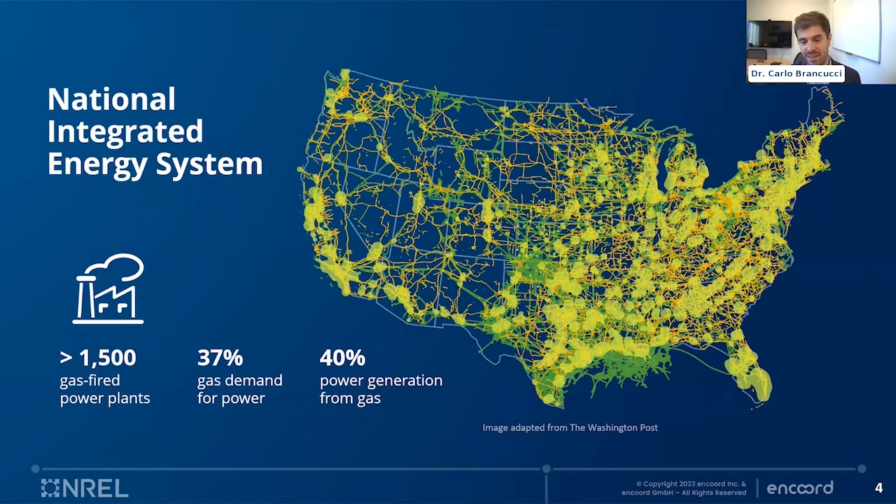This interdependency and this critical infrastructure challenge that can significantly affect national security is exacerbated during extreme weather events. And I'm going to show you an example of a balancing area of the US power system from February of last year. This is real data taken from EIA, the Energy Information Administration, that shows how in this balancing area in the United States, during this 5-day period, there was a significant electric demand day-ahead under forecast. So the power system operator under forecasted the demand that it expected the following day for some reason.

That following day, what happened is that wind power dropped from generating over 3,000 megawatts to just over 300 megawatts. So over an 80% decline in a 20-hour period, while demand was increasing during that period. The system was able to meet demand and keep the lights on.

And this was possible thanks to the response of very fast responsive gas-fired power plants that were able to increase their generation from 1,400 megawatts to 3,800 megawatts in 18 hours. That means the gas pipeline network was able to significantly increase the gas delivery at those gas-fired power plants, so they could ramp up from 1,400 to 3,800 megawatts in just 18 hours.

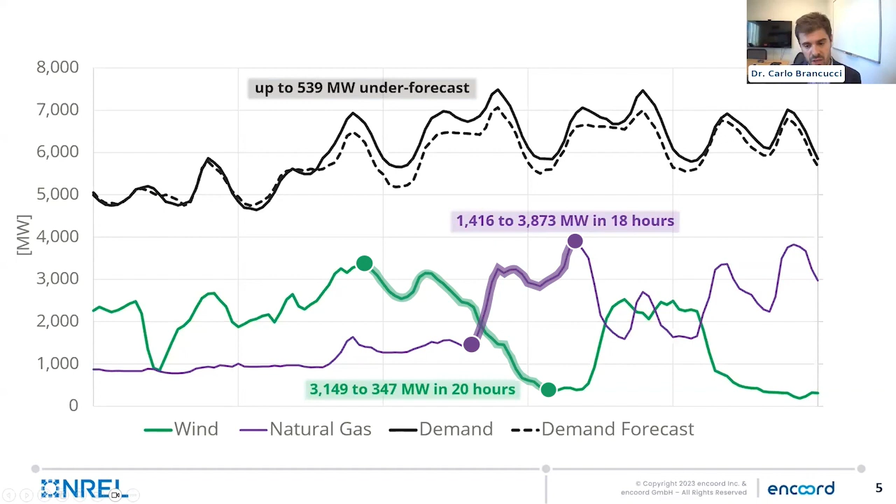What makes this scenario extremely interesting is the fact that this happened during a very extreme cold scenario. This again is real data from a real power system last year. While this was happening, temperatures dropped from 50 degrees Fahrenheit to -3 degrees Fahrenheit in 20 hours, or from 10 degrees Celsius to -19 degrees Celsius.

Why this is a great example of the challenging interdependency of electric and gas infrastructures is because the natural gas infrastructure, at the same time that it was responding to a large increase in gas-fired generation to meet the load under forecast and the decline in wind power, had to meet a significant increase in gas demand for heating. Every building in this region significantly increased its natural gas consumption to keep the homes, the commercial buildings and the offices at safe and healthy temperatures for the people in those buildings.

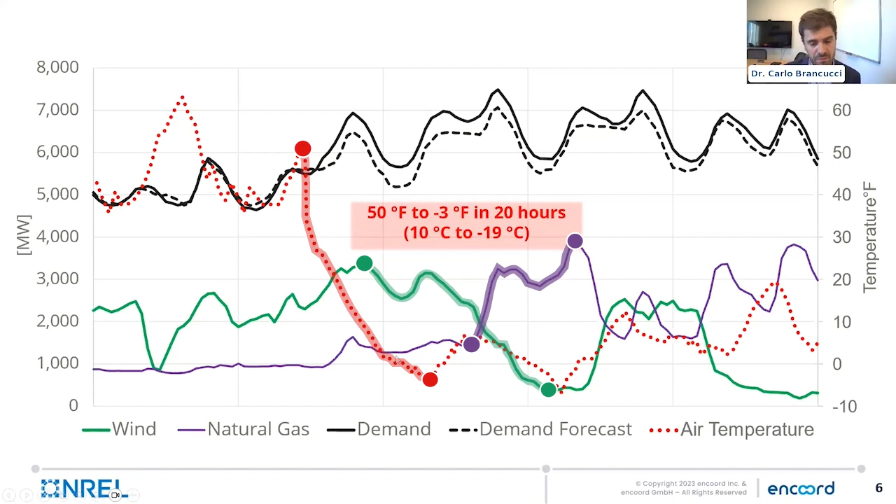So you can just imagine the major stress that this caused in the gas pipeline network that was delivering gas to the gas-fired power plants in this balancing authority. In this specific scenario, we know that the gas network operator was able to meet both its electric system gas demand and the other gas demands. But this was possible thanks to the flexibility it can provide. And Brian will talk more later about what the value of that flexibility is and what could happen if that flexibility wasn't there.

I want to show one last example. This is from March of this year for the same balancing authority. I'm showing these examples because I want to highlight that these, what we call extreme events, are actually not necessarily that rare. This is an event that happened again in March of this year, where wind power dropped from generating 58% of the demand to generating zero in just 12 hours.

That meant that gas-fired power plants had to go from generating 25% of the demand to 76% of the demand in that 12-hour period. This did not happen during an extreme cold event, but just during a mild temperature period for this region of the United States, where temperatures fluctuated between 30 and 50 degrees Fahrenheit during this 5-day period.

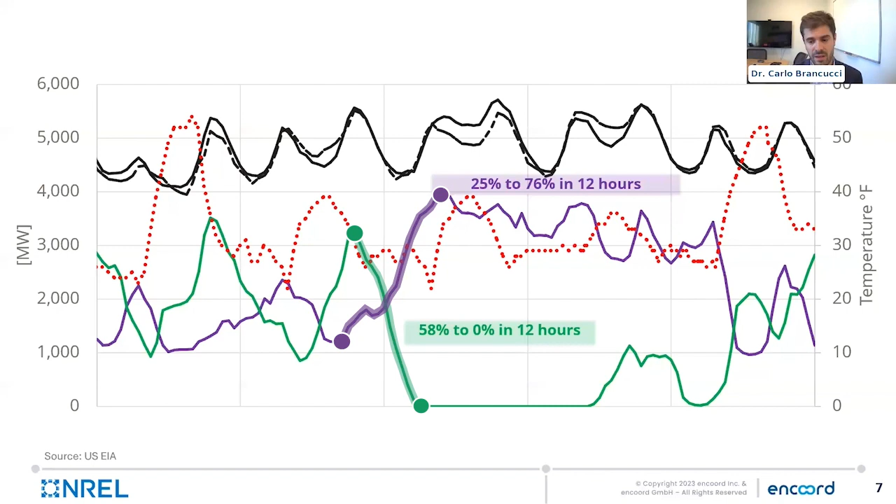As we integrate more renewables and as climate change causes more extreme cold events that in some cases may be harder to forecast, the challenge of the interdependency of electric and gas networks on national energy security is becoming more of a concern for many of us that work in the energy industry. I want to ensure our electric and gas infrastructure are ready to deliver power and to deliver heat when needed.

That's what drove NREL and encoord to do a study on the hidden flexibility of the natural gas network for electric power operations, a case study of a near-miss winter event. And I will now give the word to Brian Sergi from NREL, who is going to walk you through the study that we recently published.

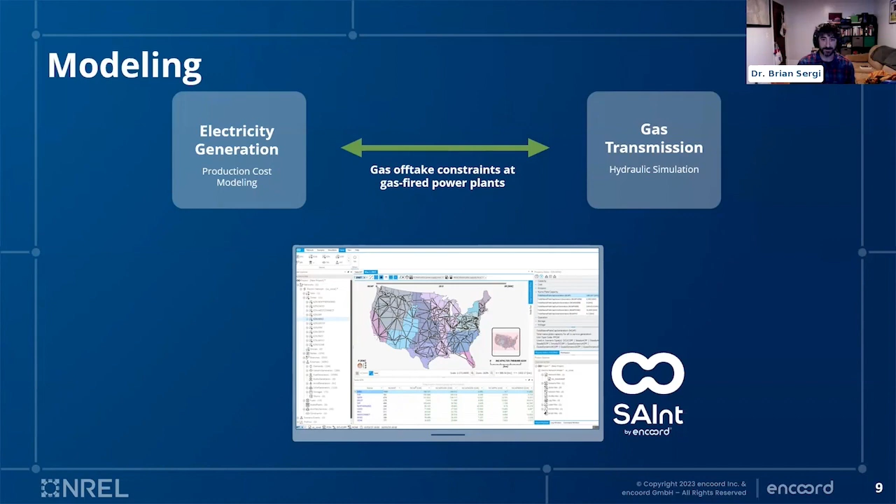For this study in particular, we start out by taking some of this data that Carlo mentioned and using it to build models of both the electricity and the gas transmission side. A big plus here was working with our collaborators. We were able to get access to more detailed pipeline information, which helped us understand more of the dynamics on that side. We also start by benchmarking this model. We compare it to what actually happened in reality, to get a sense of whether, under our baseline assumptions, we are appropriately capturing what happened in the system so that we can then expand from that with other sensitivities to test different scenarios.

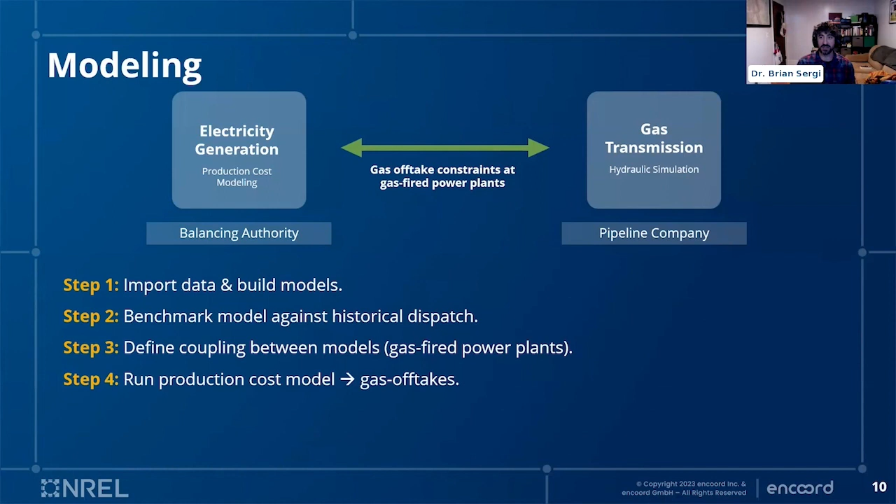As I mentioned, the main coupling point between the gas and the electricity generation networks is the gas-fired power plants, which take gas off of the gas network. So the modeling framework here is to run the production cost model. In that model, the balancing authority is determining what it would like to schedule gas generators to do. And from that, you can deduce how much natural gas they need to offtake at each plant.

That gas offtake is sent to the gas transmission network system, and it is basically taking into account that demand along with all its other demands, which might include gas for home heating and industrial uses, or deliveries to other customers that are outside of the power system network.

So the gas network then tries to simulate the delivery of all those gas requirements, and if it's constrained, if it knows that it can't deliver enough gas at the required pressure to a certain part of the network, it will curtail deliveries at that node. And this is set up to curtail at gas generators first, which mimics reality where other users like home heating are curtailed last because they're the highest priority.

So then lastly, we take any constraints from that gas transmission network and we feed it back to the production cost model. So if the gas network says, hey, I can't deliver sufficient gas at this node with this gas generator that you've requested, it will send back a constraint saying, this much is available and the system can operate this way. And then the production cost model has to redispatch the system based on those constraints. So it will typically curtail operations at gas plants where the gas network is constrained, and then increase dispatch at other plants that either have no gas constraints or don't use gas at all.

And then another dynamic I want to mention here is, as Carlo alluded to in this real event, there was under forecasting of load, but also a big dramatic change in the wind output, which caused a need for the gas generators to increase very quickly. Now, in reality, the gas transmission operator helped meet that unforeseen increase in demand from the natural gas generators by shifting some of its deliveries. So instead of delivering some gas to outside customers, it provided gas earlier than expected to the electric power system and forestalled some of those other deliveries.

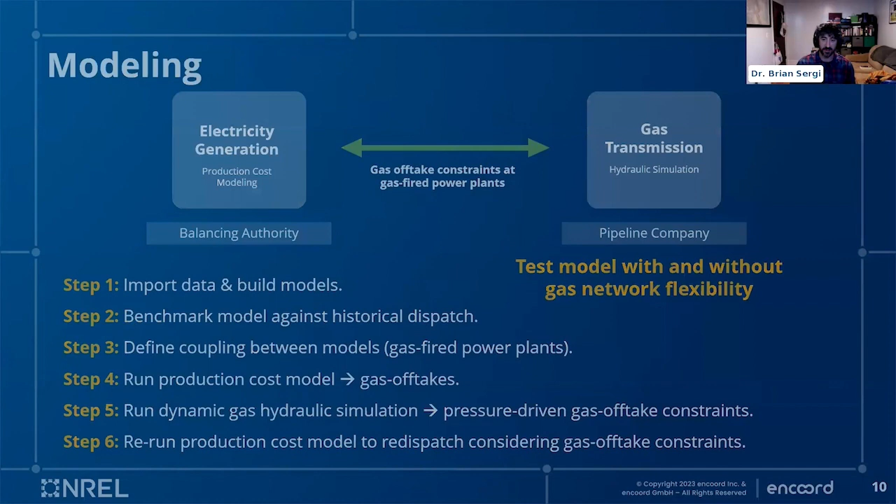And what we saw here is the system responded by redispatching mostly to coal. So you had coal generators that had unused capacity. You either committed some new coal units or you increased generation at coal units that were active. And the result was, over the course of these 6 days, an increase of several $100,000 in operation costs on the power system, a little under 3% of the total operating cost for that system.

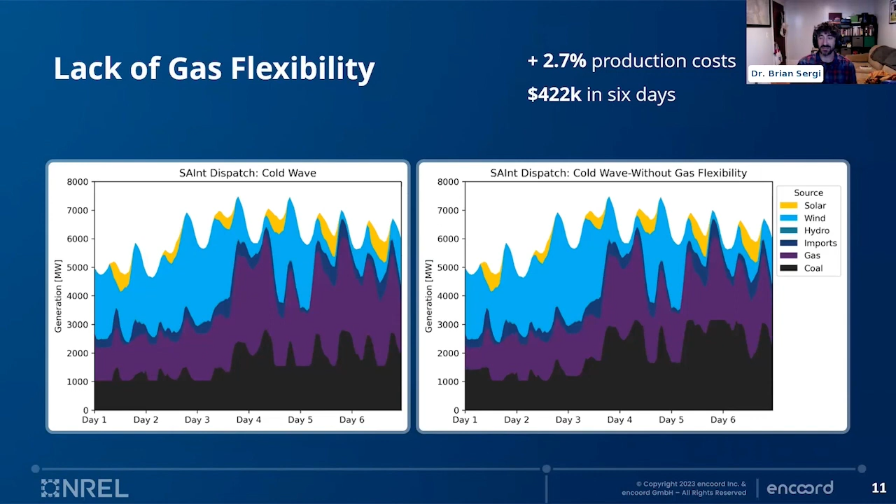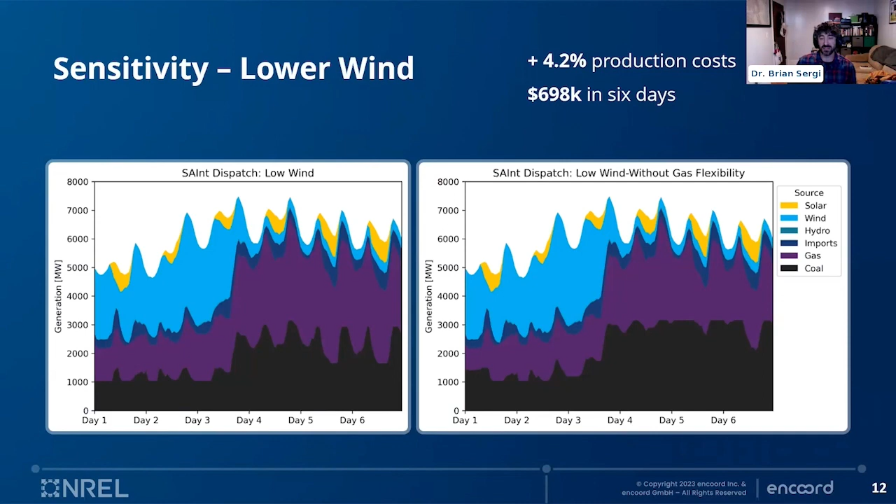So that's just one scenario, but as Carlo noted, there was this other case. This was a different weather event where the wind dropped to 0, and so we wanted to push this further and say, well, what if there was no wind? What if that wind lull happened for several days instead of just the 12 hours that it occurred in reality? And so we simulate this lower wind. It's a hypothetical scenario, but we extend that low wind period to be several days, and we find a similar result. Now you redispatch even more coal and also some other gas that might be in different parts of the network without constraints, and you see a bit higher increase in the total production costs as well.

So just to summarize some of the findings so far, we do see that the gas network is able to provide some interesting sorts of flexibility to the power system. And sometimes those are behind the scenes.

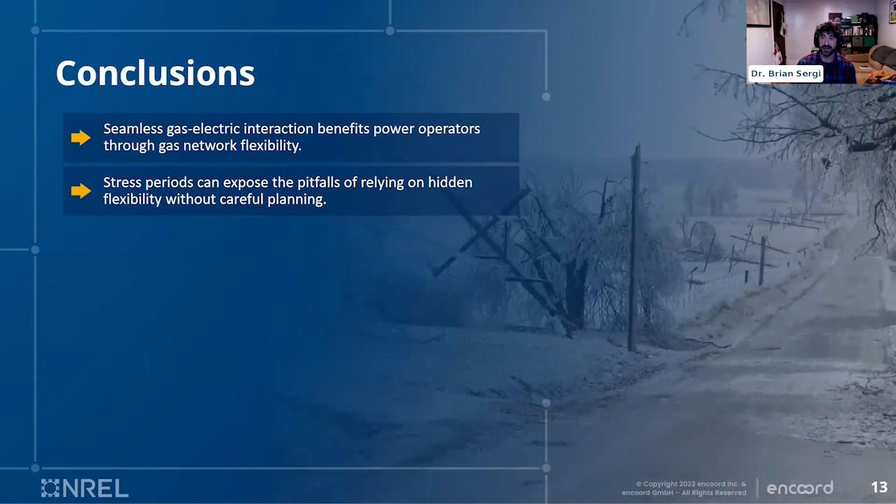So it provides a lot of benefit to the electric power system, which is great when it's available. But if it's not available, then the electric power system is relying on it. That could cause problems. And so these kind of stress periods can, I think, expose some of the pitfalls of just relying on that flexibility without coordinating it and making sure that you have it available. And so, the rest of these points here, maybe talking about some ways we can start to plan out and

address that. One area of improvement certainly is enhanced forecasting. If you know that these types of events are coming, you can prepare for them, particularly on the gas side. You can prep by moving gas into storage or packing it in as line pack. So if you have anticipation, then maybe there are actions you can take to mitigate them in advance.

Another potentially useful intervention here is looking at higher resolution gas nominations. So right now, most gas-fired generators ask for gas from the gas network at a daily level. They ask for basically an average amount for every hour over the course of a day. But in reality, they're often ramping up and down quite a lot during that day. And so maybe more granular information on when they actually need gas at a higher temporal resolution could help the gas network ensure that it could deliver sufficient gas when the electric power system needs it.

One potential option that's talked about often here is firm contracts. So these are contracts where they are not curtailable. So the gas generator might be guaranteed to get the gas. These are typically more expensive, so they may not always be an option for gas-fired generators, particularly given areas where they're in market competition. It could be harder for them to be available for dispatch if they have these more expensive contracts. So it's one mechanism, but maybe not always a solution for all cases.

And then lastly, in general, we think more coordination between gas and the electric power system on investments of things like storage, either on the electric or the gas network side, probably can help in terms of mitigating these types of events as they come.